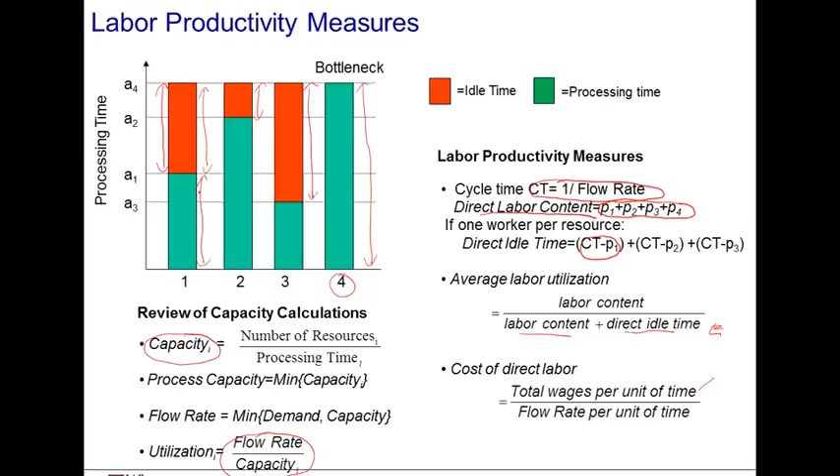To practice our new definitions, consider the following example. This here is a machine-paced line consisting of 6 workers working in sequence. It is a machine-paced line because you notice there are no buffers between the stations, meaning that these 6 workers have to work exactly at the same pace.

Though the first station has a shorter activity time and thus excess capacity, that station cannot run ahead. The entire process will be paced by the slowest step, which, as we will see in a moment, is station number 5. Now let's practice our definitions.

We have the processing times over here in this first row. Next, we can compute the capacity as simply 1 over the processing times. For the first one, let me put the units along here.

So this is units per minute. 1 over 5, 1 over 2, 1 over 3, 1 over 6, 1 over 2. We can apply our definition of the bottleneck and say that the step with the lowest capacity is the bottleneck. That makes station 5 indeed the bottleneck.

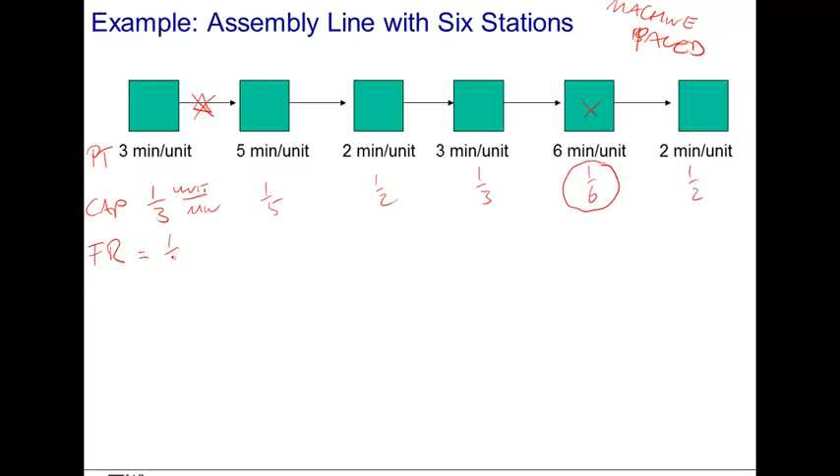Assuming there is enough demand for this process, we're going to have a flow rate that is going to be 1 unit every 6 minutes, which corresponds to 1/6 unit per minute. Or alternatively, we could say that this process is producing 10 units per hour.

We can then define the cycle time of the process as 6 minutes between units, which I hope is intuitive because that is exactly the activity time that we have here at the bottleneck. Next, we can compute the idle time at each of the resources as the difference between the cycle time and the processing time. That would be 3 minutes here, 1 minute here, 4 minutes here, 3 minutes here, 0 minutes here, and 4 minutes here.

We'll then define the labor content as the sum of the processing times, which is 3 plus 5 plus 2 plus 3 plus 6 plus 2, which makes a total of 21 minutes per unit. The total idle time across all units is 3 plus 1 plus 4 plus 3 plus 4, which is 15 minutes. We can then define the average labor utilization as 21 minutes labor content divided by 21 plus 15, which is the average utilization in this process.

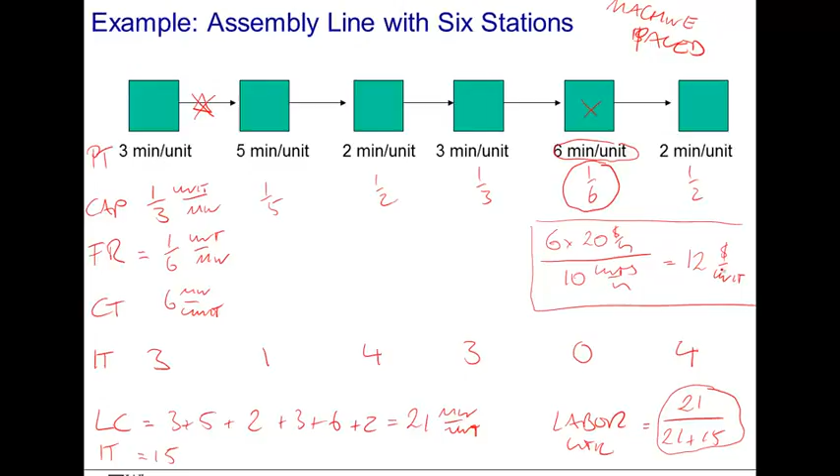We can also compute the cost of direct labor in this process as the ratio between the wages and the flow rate. Say for sake of argument, each of my workers here is making $20 per hour. So my wages are 6 workers times $20 per hour divided by the flow rate, which we said was 10 units per hour. This gives me a direct cost of labor of $12 per unit. Let me take these calculations that are arguably somewhat messy right now and plug them over into my Excel spreadsheet where you can read them more clearly.

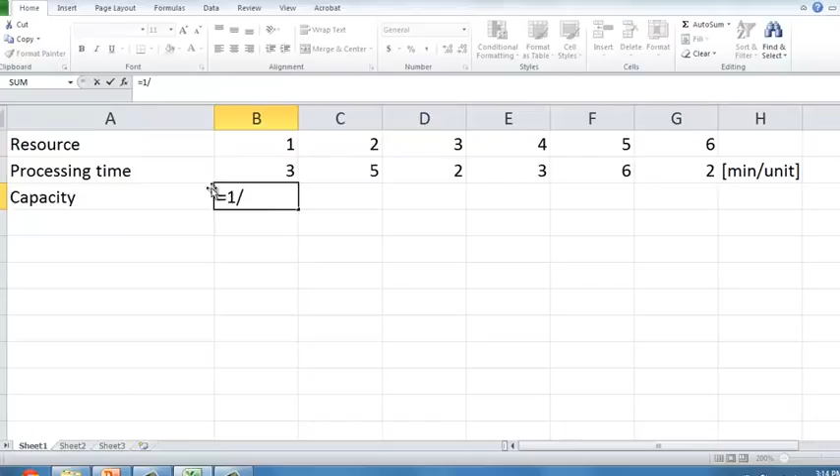Alright, let's review this calculation in Excel. So the first thing that we're going to do is we compute the capacity of each of the resources as 1 divided by the corresponding processing times. This is now expressed in units per minute. Next, we're going to compute the process capacity as the minimum of the individual capacity levels, which determines that indeed station 5 is, as we expected, the bottleneck.

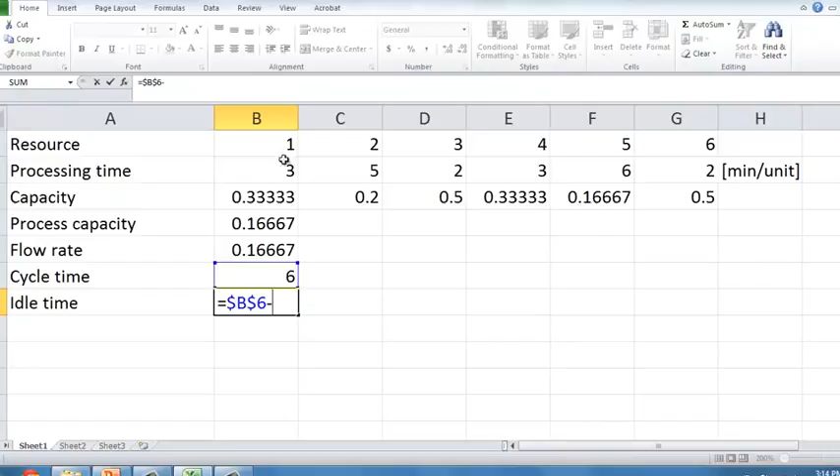We can then compute the flow rate as the minimum between demand and capacity. We assumed here that there was sufficient demand, and so the flow rate is given by the process capacity. We can compute then the cycle time as 1 divided by the flow rate, which is telling us that we are making a unit every 6 minutes. This allows me then to compute the idle time at each of the resources. For that, I'm going to take the cycle time and I'm going to subtract the processing time at each of the resources.

With this in mind, I can compute a total idle time, which we confirm to be 15 minutes. Now, is 15 minutes a lot of idle time or not? This is really hard to judge. And so we compare this number to the total labor content in the process, which we previously defined as the sum of the activity times.

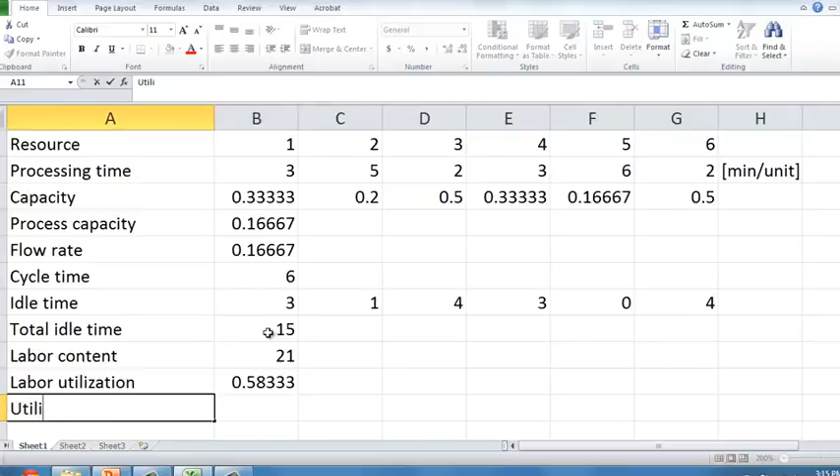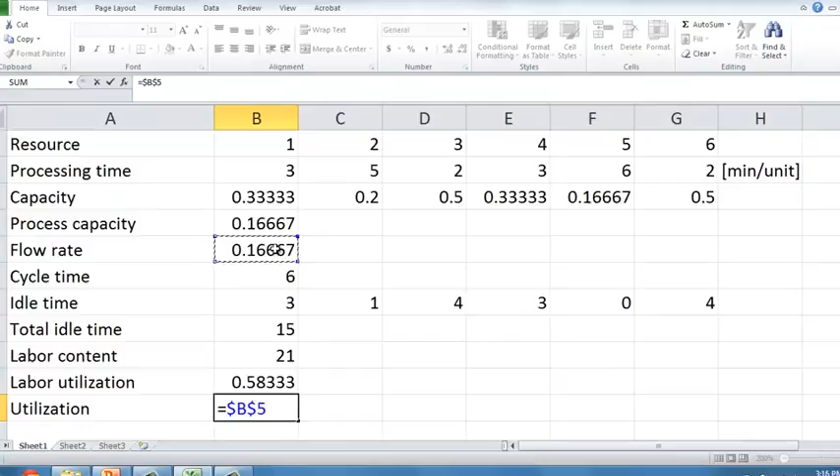I can then compute my labor utilization as the ratio between the labor content and the labor content plus the idle time. 58% is my average labor utilization in the process. Note the following. Let's quickly compute the utilization of each of the 6 steps in the process. Utilization, remember, is the flow rate divided by the capacity.

You notice 100% utilization at the bottleneck, which I hope is intuitive. We can then go ahead and average the utilization of the 6 resources, and voila, we also see a 58.3%.

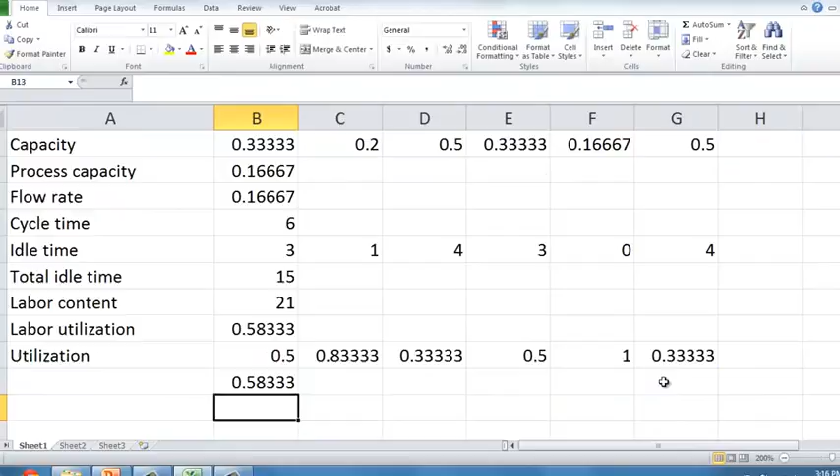At the risk of repeating myself, let's go back to the subway example and revisit the previous calculations that we did. Now extend these calculations by the following. The cycle time is computed as follows. We said that there were 60 customers per hour. That means every 60 seconds, since there are 3,600 seconds in the hour, we have a unit of demand. The cycle time thus is 60 seconds.

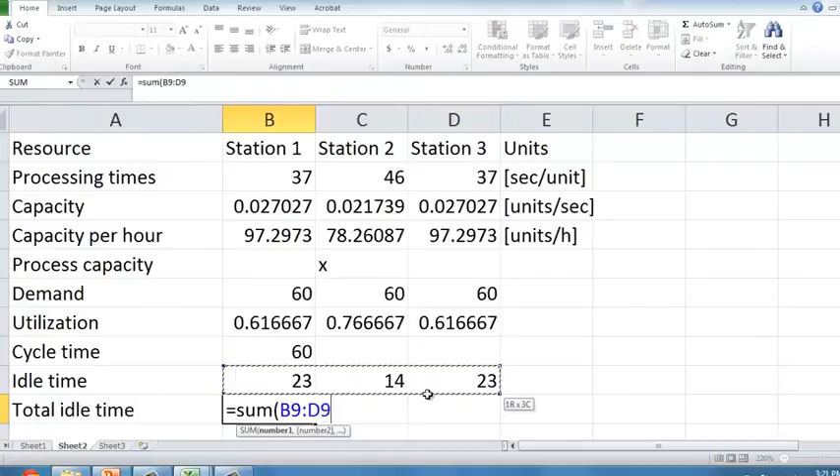We then can compute the idle time of the various resources as the difference between the cycle time and the processing times. We can sum up the total idle time and find it to be 60 seconds. This is really 60 seconds per sandwich. The next thing that we can do is compute the labor content, which is also expressed per sandwich, as the sum of the processing times.

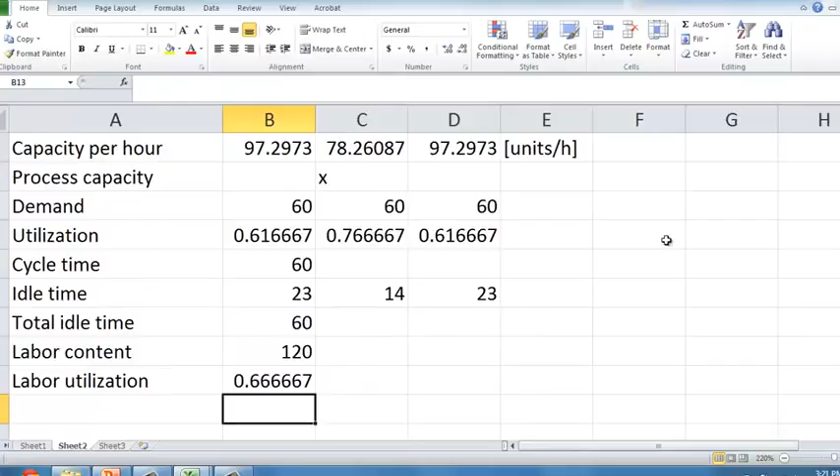With those two pieces of information, I can compute the labor utilization as the ratio between the labor content and the labor content plus the idle time. This is 66.6%. Notice, by the way, that as before, this is also exactly the average of the individually computed utilizations.

I often get asked why we make such a big deal out of labor cost. If you analyze the P&L from big corporations in manufacturing these days, you actually see relatively little labor cost on their P&Ls. My colleague from MIT, Dan Whitney, has done a very interesting analysis in the automotive industry that addresses this matter. If you analyze the profit and loss statements of an automotive company, you indeed see that the vast majority of the money is spent on purchasing. About 70% of the total cost incurred at Daimler Chrysler at that point was spent on purchasing.

This is very similar if you look at electronics makers, who are also going to spend 70 to 80% of their total cost on procuring items such as disk drives and microprocessors. Now, the labor cost here, if you look at things related to assembly labor and maybe inventory cost, is just a tiny fraction. However, this is misleading. This is hiding the fact that your purchasing costs are the total cost of your supplier, and that includes their labor cost. So if you look at your labor cost plus what the supplier is spending, labor is actually becoming a bigger component.

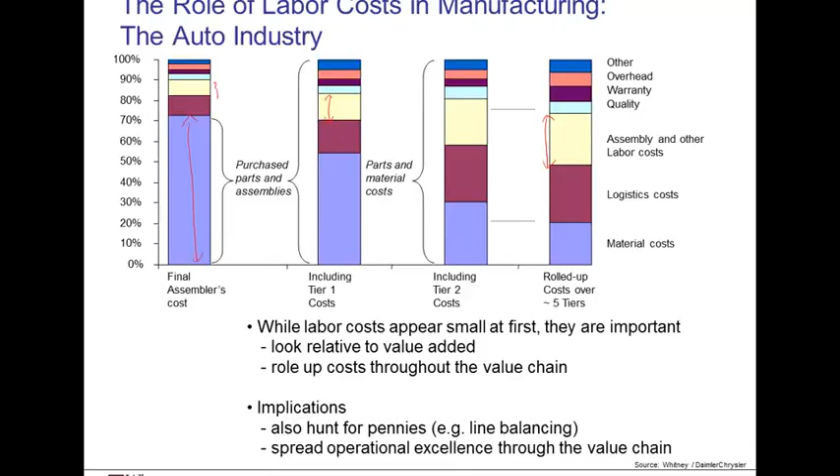If you're rolling this up throughout the value chain, you actually notice that a very significant part of the item in a vehicle is spent on assembly labor. What the recent trend towards relying more on suppliers and emphasizing purchasing has done to the P&L statements is hide labor costs from our books, shifting the labor costs to our suppliers. However, they haven't disappeared. They're still in the value chain. And what top-notch manufacturing companies do is work closely with their suppliers to further reduce these labor costs, independent of which books they are listed on.

In this session, we introduced two measures of labor productivity. We talked about labor utilization, and we talked about the cost of direct labor. Neither of these two measures is good or bad by itself. Labor utilization is more a measure of line balance. However, we might have a perfectly balanced line of very expensive workers, so a process could be very unproductive but have a perfect labor utilization. The cost of direct labor is capturing another angle of that productivity. It captures the wages that we have, as well as the productivity of the employees in terms of how many units of output they can create relative to their wages.

We've also seen how firms can hide labor from their books by relying more on their suppliers, ultimately by outsourcing the labor. If you think about Apple and Foxconn, Apple might only have 60 or 70,000 employees, but Foxconn as their main supplier has over 1 million. So saying that based on the financials at Apple we don't see a lot of manufacturing labor there, and thus manufacturing labor is not important for Apple computers, is really misleading. Labor productivity, on your books or on your supplier's books, is absolutely critical in operations. For this reason, we'll revisit many aspects of labor productivity when we talk about the productivity module a week from now.